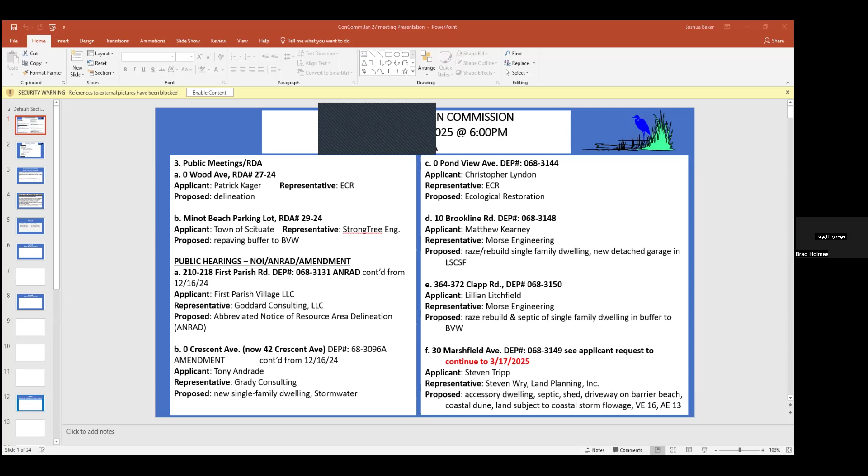If you want to pull up a plan, great. We're waiting, coming, we're clicking away. There it is. There we go.

The property at Zero Wood Ave is the triangle here in the corner between Eli Ave, Montvale Ave, Wood Ave, and Hatherley Road. The property consists of a vegetated lot, contains mostly non-native invasive plant species, with a little bit of native plants in there. There are no water bodies or wetlands on or near the site. There is a coastal flood zone further to the north associated with Musquashcut Pond, but it doesn't come close to the property, so there are no flood zones or other wetland resource areas on or abutting the site. We've filed the RDA to confirm that this lot doesn't contain areas subject to review under the State Wetlands Protection Act and Town of Scituate Wetlands Bylaw. There are no activities proposed as part of this application, it's just a confirmation of that area. I did get a chance to meet with Frank and Jen on site, and we walked the property and got a feel for the site. It's a simple request. So with that, I'll bring it back to the commission.

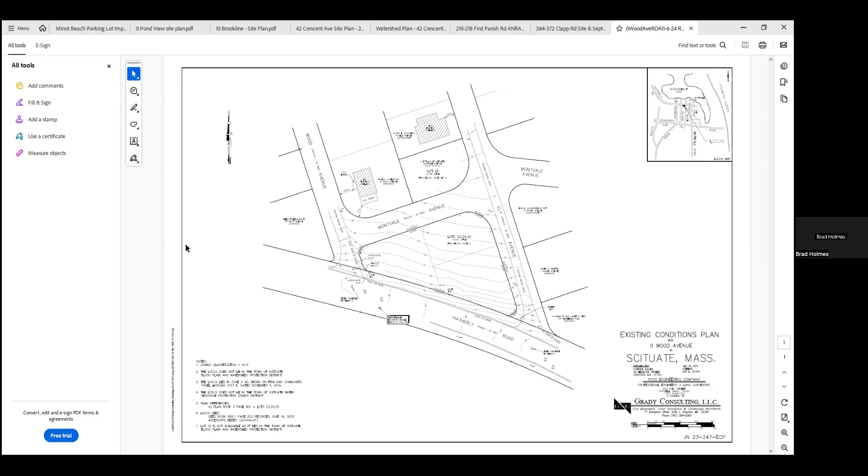Montvale, is that a paper street there, or does it actually go through there, Brad? It's a paper street. Yeah, that's what I thought. Yep, it's wooded between Hatherley Road and that first house on Wood Avenue.

Right. So if a project does come before us, they understand they can't go on the paper street, right? If a project though, make sure people know that is a paper street, that it's not private property. Correct. Yes.

Okay, I'm all set then. Thank you. Richard, I'm good. Thank you. Eric? I'm good as well. Thank you.

Okay, and I don't think I have any questions. Penny kind of hit it with the Montvale Ave one.

Audience, thank you. If you are in the audience and you have a question about this one, or a comment, now would be the time to raise your hand virtually. I don't see anything, hands raised.

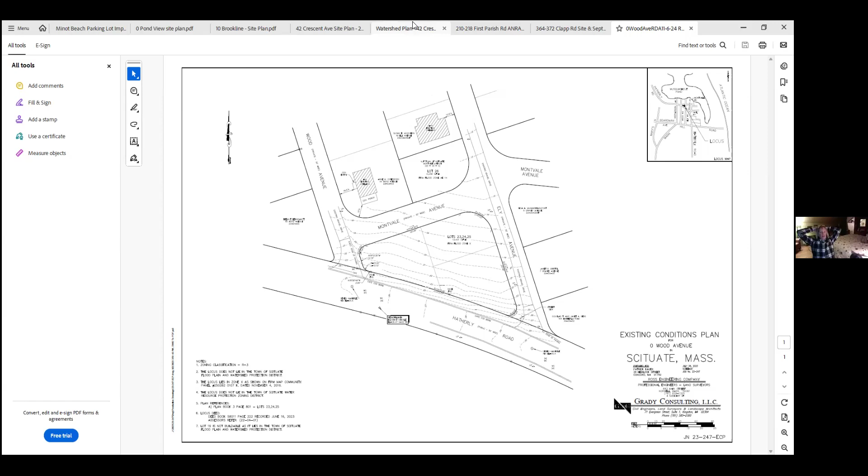I'll make a motion for a -1 on 0 Wood Avenue. We'll take a second. Second from Penny. Eric, yes. Jen, yes. And Richard, yes, I made the motion. All right, I think we're good on 0 Wood Ave.

Thank you very much. Have a good night. You too, Brad. Hey, alright. Frank, you're back. Jake, will you move?

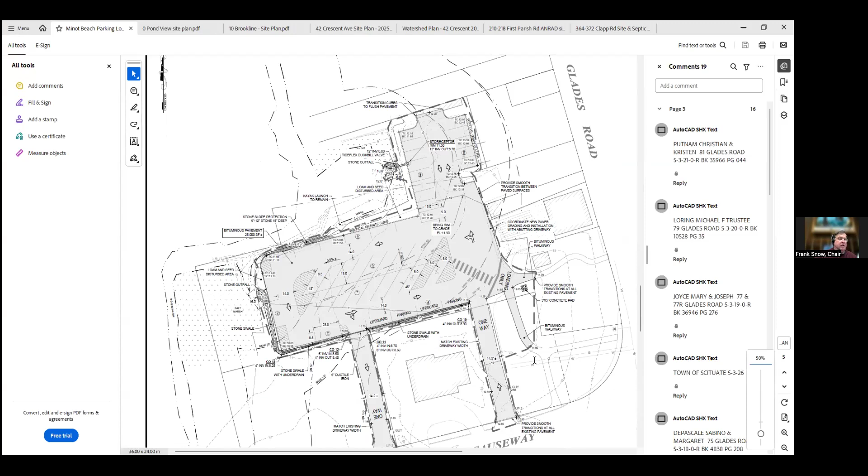So let's see what this is for: Minot Beach parking lot RDA, town of Scituate. On January 27th, 6 p.m., the Scituate Conservation Commission will hold a wetlands hearing under Chapter 131, Section 40 of the Massachusetts General Laws and Section 30700 Town of Scituate Code of Bylaws, at the request of determination of applicability filed by the Town of Scituate DPW to improve the recreational kayak launch parking lot for Minot Beach. Abutters and other interested parties are invited to attend. Information to access the meeting is available on the agenda posted on the website.

I think is Sean presenting this, or is somebody from... I am here, Mr. Chairman, thank you, as well as two of the design team. Great, I think I might have gotten one person. If they can raise their hand so I can unmute them. This is Katerina here, I believe. I've unmuted. And there's another, Matt. Matt, he's also unmuted. Hi there, thank you, Sean, for the introduction.

We're with StrongTree Engineering. My name is Katerina Korolov. I'm the wetland scientist and permitting specialist for StrongTree, and Matt Lehman, who is also on this call, personally did the drafting on the site plan, so he's well acquainted with the site in case you have any technical questions. However, this is really an RDA, request for determination of applicability.

So I'll just give you a simple outline here. As you can see on this site plan, the goal of this proposed project is essentially parking lot improvements at this Minot Beach kayak launch, which is an approximately 0.75 acre lot located along Bailey's Causeway. The existing parking lot does experience regular flooding and waterlogging and outdated drainage systems. The proposed project is considered a repair, maintenance, and restoration project and is not anticipated to have any permanent impacts to the resource areas around. We are essentially upgrading the existing parking lot.

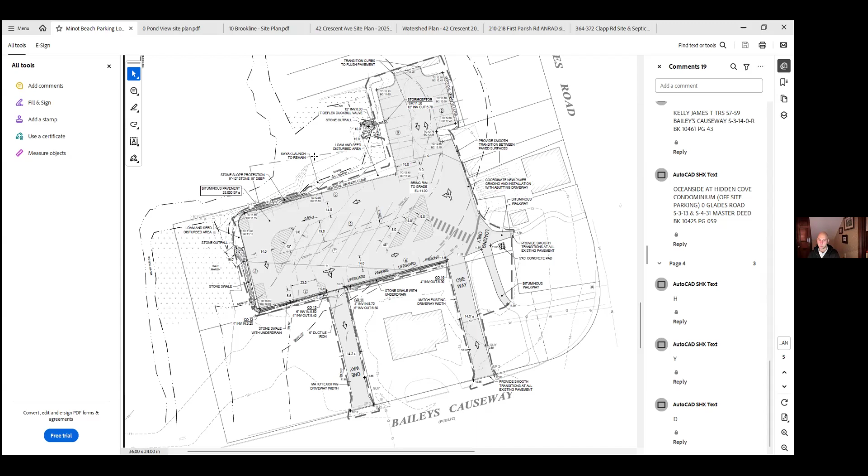Like Richard, I think that exploring some other way to improve the condition of the site, if we don't have to have impervious pavement, that would be preferable throughout the entire thing, because to Jen's point, we do hold individuals to certain standards. If they're going to be doing work on a property, we like as a commission to see improvements to that site. Whether or not that's possible in this situation, I don't know, but I thought Richard's suggestion was a good one. That's all I have for now.

Okay, thank you. Frank? Yes, Penny. Yeah, my only problem with that, Eric, and the rest of you, and I understand where you're coming from, but in a sense, I might be wrong, Frank, but it's always been asphalt, so it's kind of grandfathered in.

When we have a driveway near the beach, they're removing it though, Penny, and if someone was to remove impervious surface at their own place for a project, we would ask that removal be replaced with something that is pervious. I think that's where we would ask that, but if they already had asphalt, it is grandfathered in. That's all, it's a tricky thing.

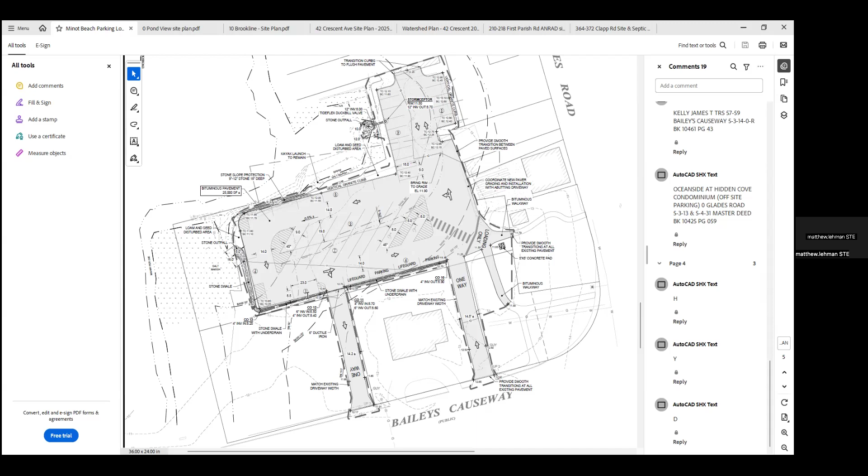Good evening. I just wanted to point out, in case it was missed, that the northern section is currently used as a driveway and parking area. It's very hard packed, dense grade and gravel, and it's currently acting as an impervious surface, discharging pollutants associated with sediments that accumulate there. So it's not quite accurate to say we're just creating a new paved area out of nothing. In some cases, especially close to a waterway, paving is actually better than gravel because it doesn't constantly discharge sediments. I just wanted to point that out.

Thank you. So while you're on with that, in that area it looks like there's a catch basin. The plan's pretty small so I can't see it. Does that catch basin have any...

It says it's a Stormceptor. Is there any separation going on there, or what is it? So that's what the Stormceptor is, a hydrodynamic particle separator that both reduces sediment loading and will remove grease, oil, and floatables. The detail is given, I think, on the next page, just a typical detail so you can get an idea of the section. But yeah, so there is currently no treatment, and we'll be both containing the runoff and treating it.

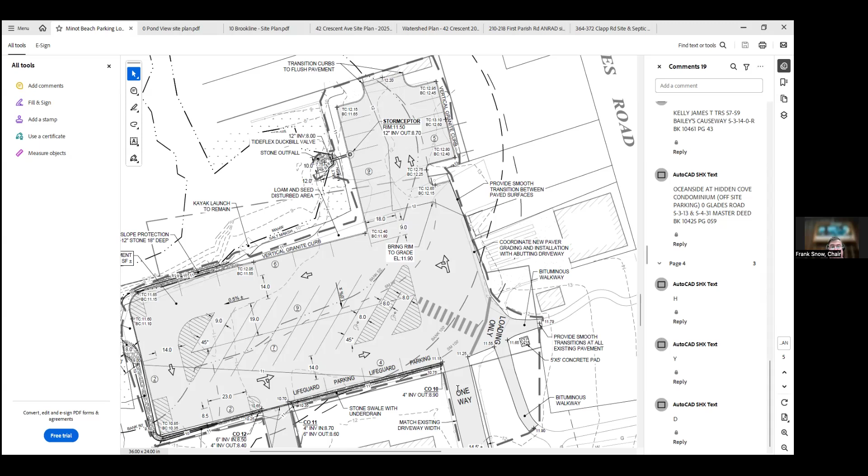So maybe Sean and team, with the input that you got from here, maybe you could take a look at it—it wasn't a lot, but things that might get addressed—and see if we can't move it along as quickly as possible. You guys can think about the shed, that's up to how you deal with that. And the boats, any kind of cleanup of all that debris I think would be a huge plus.

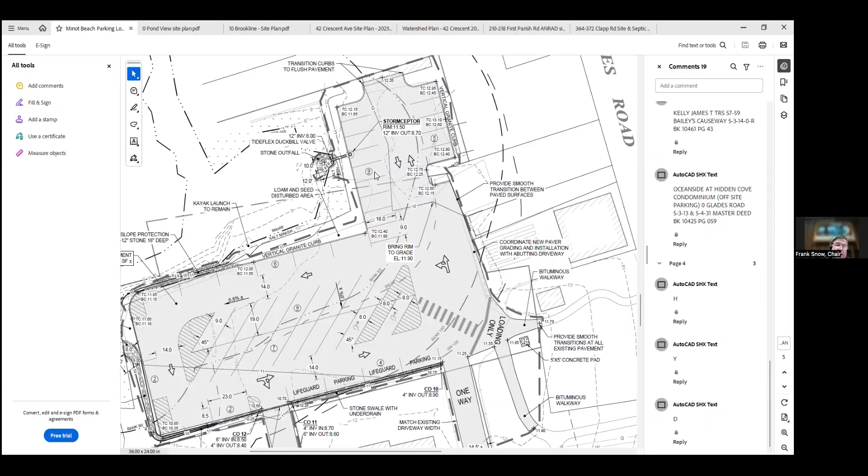Thinking about the kayak ramp, depending on the way it's situated with the riprap or whatever you put in there, if that's a tough spot, I don't know whether relocating the kayak launch makes more sense. We don't want to give it up. No, it's been a plus, but if it makes more sense to relocate it, then the only thing, Penny, I think in most of these is they're going to be slippery.

If you have anything that gets wet all the time, it's going to grow algae or whatever it's going to do. My only suggestion would be maybe something could be drilled into it with a handrail so people have something to hold on to, because concrete just becomes treacherous. I'm told people try to launch boats on the parking lot and once it starts to get wet and dry repeatedly, it's going to grow a certain amount of algae or whatever is growing there. No, that's a good idea, Frank, to put a handrail on one side. I agree.

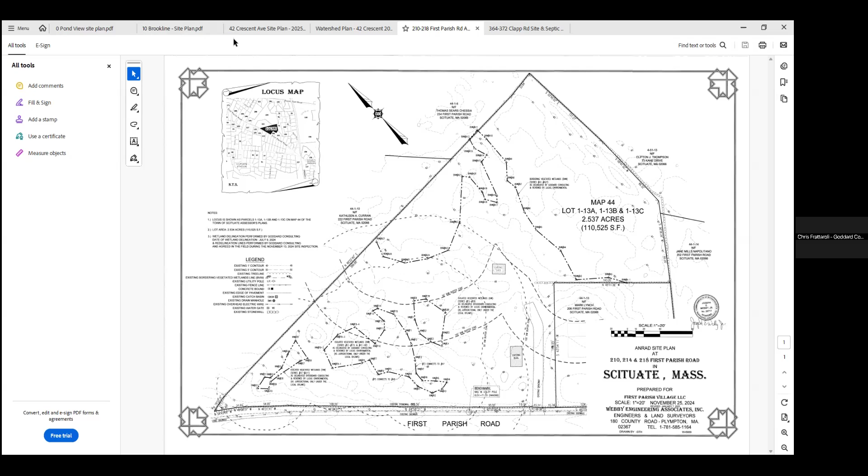Here tonight to continue our discussion of the ANRAD for 210 to 218 First Parish Road. At the end of December, we did receive a review letter from Lucas Environmental. We went ahead and made a bunch of revisions, many of them kind of housekeeping things—plan notations, clarity, those types of things. So we made those revisions and submitted that as a package to you about two weeks ago.

There were a couple of additional things that were noted in Lucas's follow-up letter, which we received a couple hours ago. So we've kind of coordinated this afternoon to begin to talk about those. But just to run through things quickly, from that first letter we had a handful of plan revisions, flag labeling, and those sorts of things, which warranted no further comment.

There was a note about the ditch along that eastern property line, sort of at the back of the site. We did not flag that in the field and have not requested it to be confirmed under this ANRAD. So if the commission would like to include a condition or fact of finding stating as much, we are perfectly amenable to that. I think what's probably going to be the main topic of conversation is the discussion about isolated land subject to flooding, ILSF.

Bob had prepared a letter that documented some of these areas up closer to First Parish Road, these 3 IVWs that we've flagged out in the field. We've come to the conclusion that none of these really even come close to containing the amount of water required to be considered ILSF. There were some additional comments from Lucas requesting additional calculations to substantiate that conclusion, and I'm sure we can talk about that more. I think Bob can probably speak to the engineering background of that better than I can.

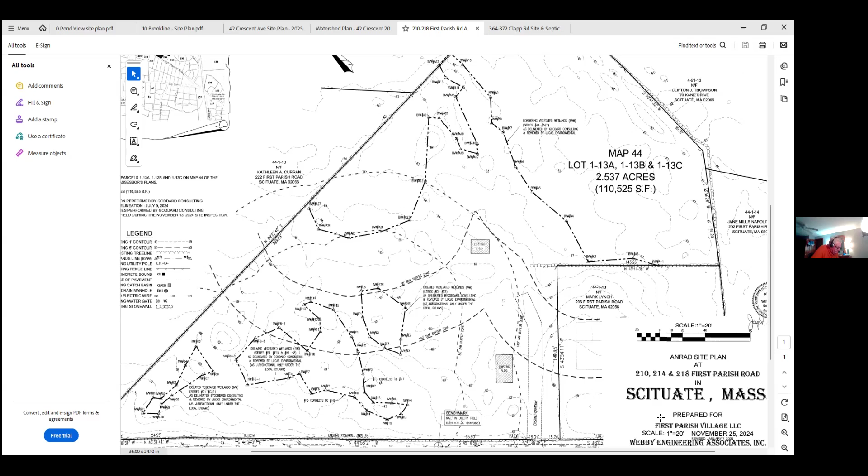Next available, Jen? Next available would be February 24th. Okay, I'll make a motion to continue First Parish Road, 210, 214, 218, to February 24th. I'll second that. Second from Eric. All in favor? Richard, yes. Jen, yes. Yes. Frank, yes. Thank you.

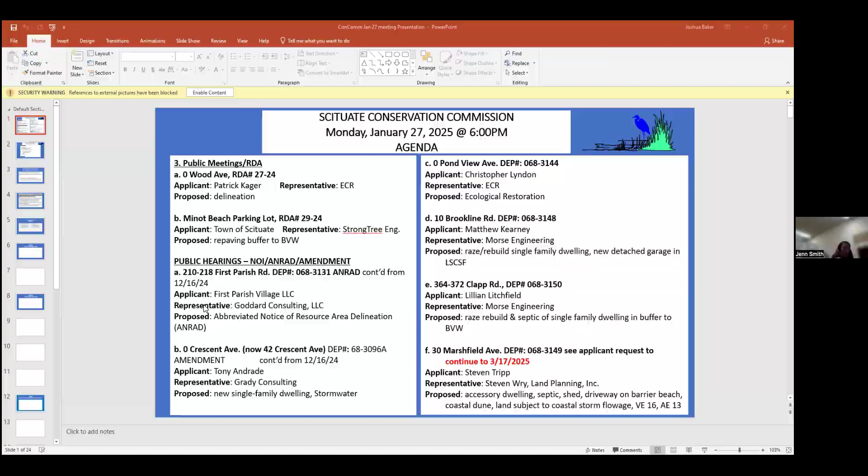All right, somebody from Grady. Yeah, let me find everybody.

Hey there, Jeff DeLisi on behalf of the applicant. Good evening, Jeff. Good evening. I think we're going to have Gabe Padilla and potentially, if you see him in the queue, Paul Maravito of Grady Consulting, and then Tony Andrade, our client, the applicant.

I think everybody on the commission is familiar with this project, this property. We last met on the 16th of December. We took six weeks intentionally because we wanted to comprehensively work with the town's peer review consultant to make sure we were able to answer questions and have a few rounds of back and forth. One of the challenges at the last meeting was that the commission really wanted a good feeling that they understood exactly what was actually happening on the property, with respect to stormwater management and the grades and things of that nature.

Noteworthy on this application, there was an approval in April of last year, then work was done. Some of that work was not pursuant to the approval. What is being proposed now, which is different than what was approved in April, is a comprehensive stormwater infiltration system. We're putting a basin up towards the top of Crescent Ave, catching all the roof runoff and directing it and infiltrating it to the basin.

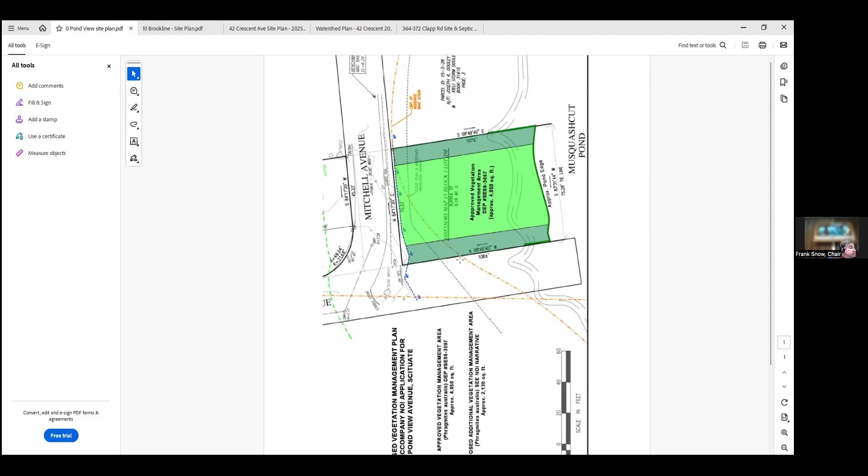10 Brookline Road, January 27, 2025. Scituate Conservation Commission will hold a wetlands hearing under Chapter 131, Section 40 of the Massachusetts General Laws and Section 30700 of the Town of Scituate Code of Bylaws regarding the notice of intent application of Matthew Kearney for demolition and construction of a single-family dwelling located at 10 Brookline Road, Scituate. Abutters and other interested parties are invited to attend. Information on how to access the virtual meetings is available on the agenda posted on the website.

We have Paul Gunn from Morse Engineering. Hi there, can you hear me? We can. All right, so again, for the record, Paul Gunn, civil engineer at Morse Engineering, here representing the applicant for the notice of intent to raze and rebuild the dwelling at 10 Brookline Road. The site currently contains an existing single-family dwelling with a detached garage, an associated gravel driveway, covered porch, and a mixture of lawn, landscaped, and brush areas. The site is currently served by town water and sewer, subsurface gas, and overhead electric.

Resource areas on site include a FEMA Zone AE delineated by elevation 15, which covers approximately 80% of the property. There are no other resource areas or vegetated buffer zones in the vicinity of the project, and the site is not located within a priority habitat, outstanding resource water, or within the vicinity of a vernal pool. The applicant is proposing to demolish and reconstruct the single-family dwelling, as well as construct a new detached garage with a raised deck. The rebuilt dwelling and new garage will be served by new subsurface utility connections, and the existing gravel driveway will be removed and replaced with a new one.

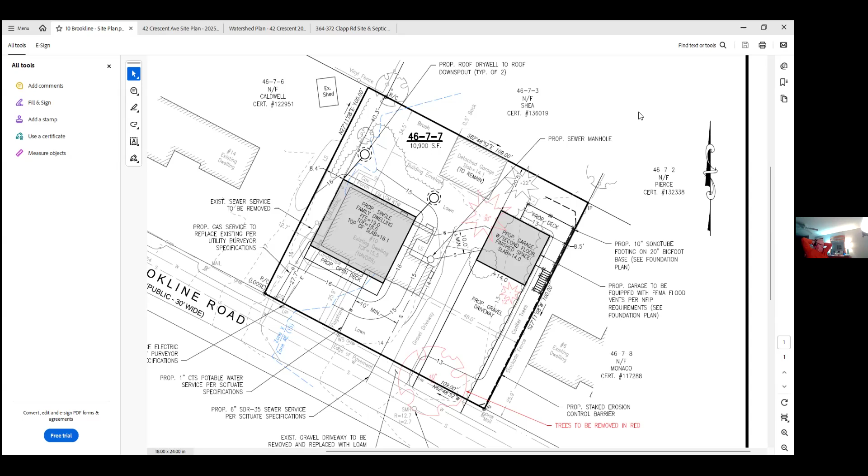Thank you. All right, we have a motion. I'll second it. Second from, what's that? Richard. Close and issue. Yep. Yes, please. From Richard, we have a second from Penny. All in favor, Eric? Yes. And Frank, yes. I'm assuming it's down to the 4 of us, right? Yep. Yeah. Okay. Thank you.

Have we heard anything back from Deb Kelly yet? No, and I don't have an email from her either. All right, let's keep going with a couple more of these and see if something turns up.

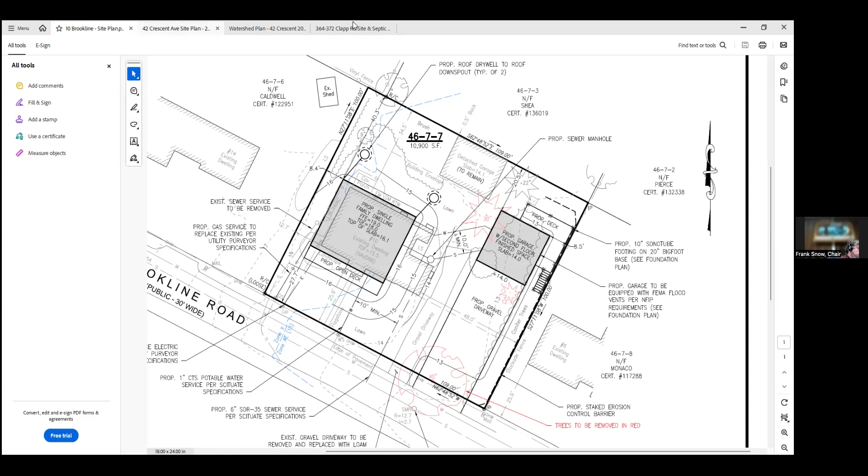364, 372 Clapp Road. On January 27, 6 p.m., the Scituate Conservation Commission will hold a wetlands hearing under Chapter 131, Section 40, Massachusetts General Laws, and Section 30700, Town of Scituate Code of Bylaws, regarding the notice of intent application of Lillian Litchfield for the demolition and construction of a single-family dwelling located at 364, 372 Clapp Road, Scituate. Abutters and other interested parties are invited to attend. Information on how to access the virtual meeting is available on the agenda posted on the website.

And we have Paul Gunn from Morse Engineering. Great. Good evening, Paul, again. Yep, thank you. Again, just for the record, Paul Gunn, civil engineer at Morse, representing the applicant for the raze and rebuild notice of intent application at 364-372 Clapp Road.

This site previously contained a single family dwelling with associated paved driveways and a mixture of lawn, landscaped, and wooded areas. I say previous because this dwelling was heavily damaged in a fire in the fall of 2023. A portion of the site to the east contains two garage structures once associated with an old auto shop. The previous dwelling was served by town water, overhead electric, and a private septic system.

Resource areas on site include the buffer to a bordering vegetated wetland, which lies just over the property line to the north. This wetland line was delineated by South River Environmental in July of 2024. The site otherwise is located within a FEMA Zone X and isn't located in any priority habitat areas.

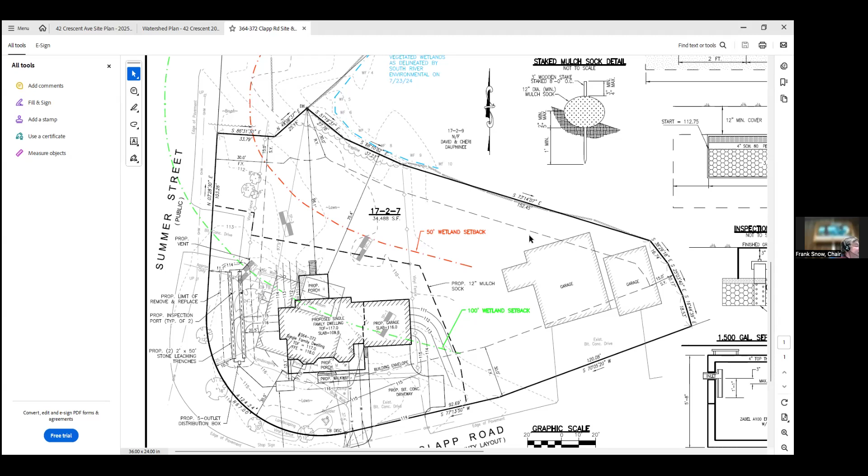If we don't have Deb, I guess we should just go back to Jeff and see where we can kind of muddle through here. I'm still here. So we're looking at this plan, the modifications - we've got the now the infiltrators in the front.

Do you want me to have Gabe just walk you through some of the changes or aspects of the plan? Sure. Gabe, are you on? He's raising his hand. Can everyone hear me? Yep, we got you. Perfect, good evening to everyone.

I am Gabriel Padilla with Grady Consulting. I'll keep this as short and sweet as possible. So from last time that we met, we received comments from Deb. We addressed all of her comments pertaining to the stormwater.

Within those comments were to show the swales that are currently shown in the plan there. There was some notes added to the plan in terms of the swale and the removal of wall. We are proposing to remove, pretty much shave off, a section of the wall that is beyond the 50-foot buffer that was built in the buffer, and then sections of wall that encroach into the right of way.

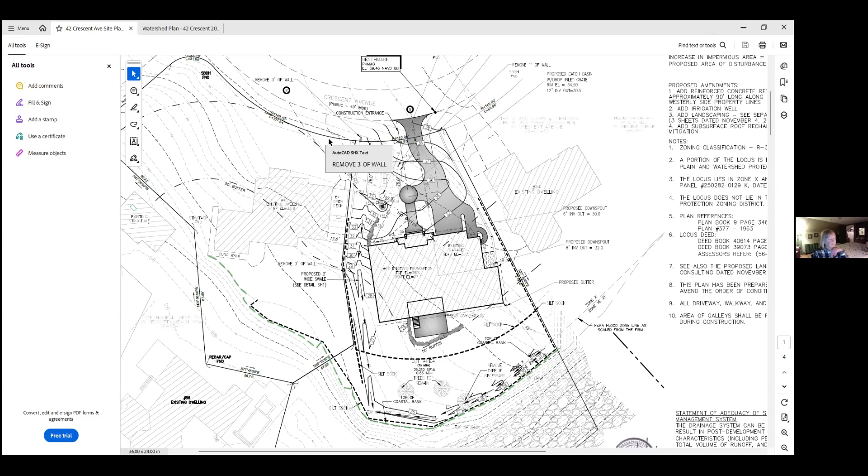If you recall, I want to say it was around contour 22 that that black dash line is, which goes into the abutting property along the rear there. There's actually no definition of the top of coastal bank in the regulation, so DEP has adopted a guideline by CZM, and CZM says it has to be a contour.

When you look at this case, there are actually two coastal banks: one along the actual bank itself, which is a man-made landform, and then the other which goes up to contour 22. To protect that contour 22, because the man-made landform isn't impacted, we've put in a fairly hardy planting strip along the contour in the back of the property. The swale was designed to be slightly elevated so that when water hit it, it wouldn't just sheet over into the coastal bank. Instead, unless it's a particularly intense storm, it would sit there and infiltrate.

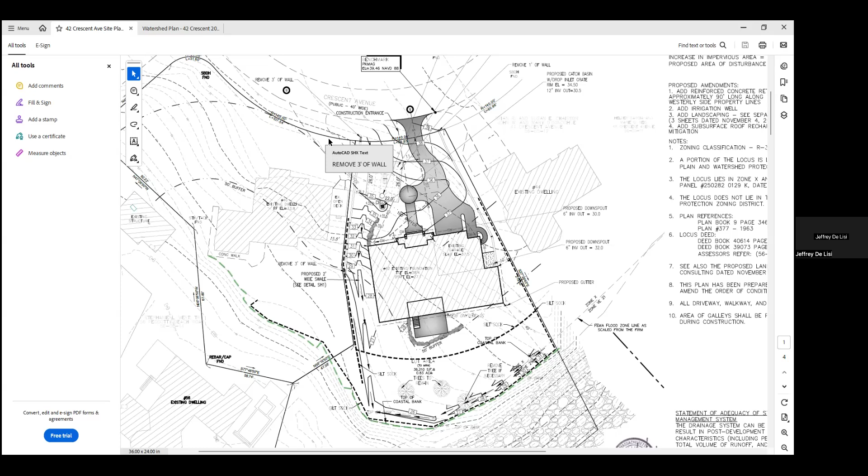That swale was shown on the plan, but the swale along the left side of the house is a new feature that wasn't on the prior plan. I also wanted to note that the retaining wall on the left side, closest to 40 Crescent, is set into the property a bit, which makes it tough to see here. There are multiple sheets on this plan, and the third sheet shows the plan for vegetative mitigation on both sides of that wall. There's quite a bit of mitigation plantings there, and also along the opposite wall. I wanted to point that out because it wasn't on the initial site plan you were looking at. That's it, thank you.

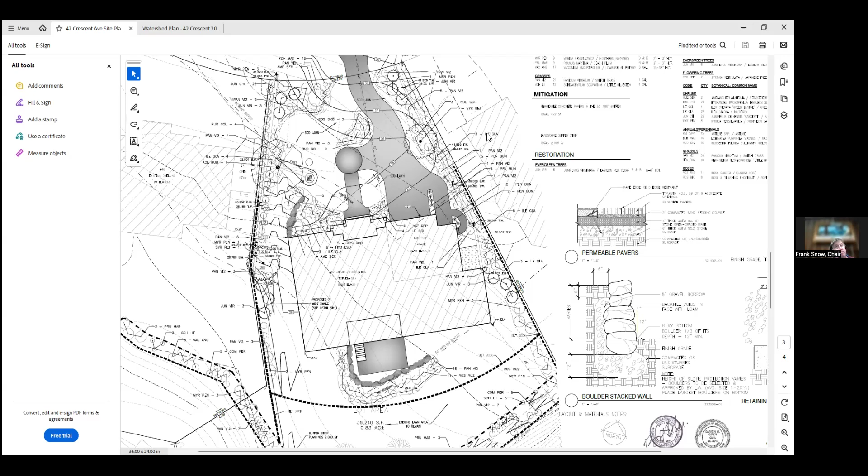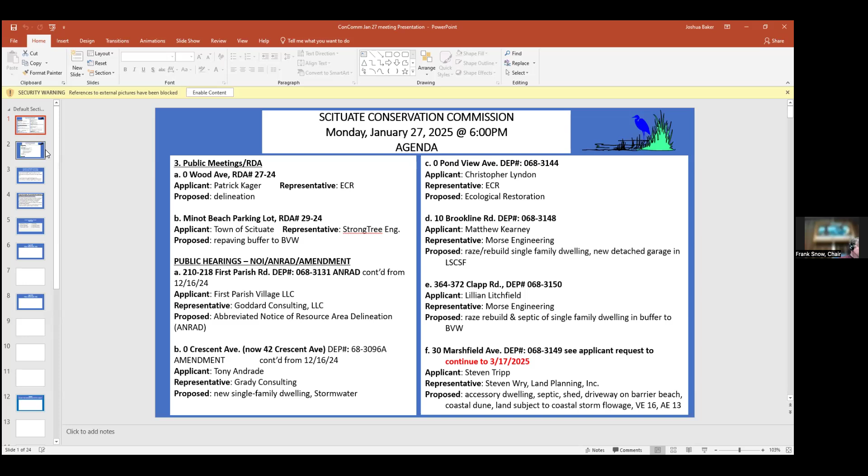Okay, what do we got on here, Jen, that we can pull together fairly quick? Minutes would be great. So that was a motion to accept the minutes as written for January 6th, and I would take Richard's as a second. Eric? Yes. Frank, yes.

We're not going to have any other updates. How about a minor modification for 37 Collier? Just because that one's been going on for a while, I did want to put the modification request on here. The site work is done, but the area between the road and their wall right now is gravel. They want to put those chunky cobblestones there, and I just wanted to let everybody know that is what they're intending to do, and then they will be done with at least the groundwork.

Hallelujah. And a minor modification is within your wheelhouse to just okay that. We were waiting to get it on a plan, that's taken a little bit, so that kind of keeps the record straight. And then the certificates of compliance: 44 Captain Pierce is the original orders that expired, so not the orders they're working under. He just needs those closed out to clean up his records.